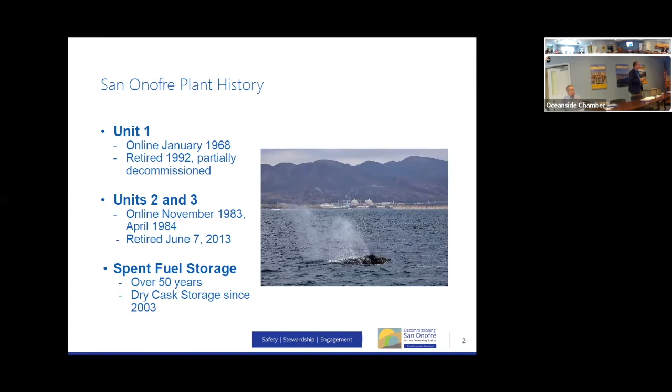When we talk about decommissioning, it's really a long-term process. The Nuclear Regulatory Commission gives nuclear plants 60 years to decommission. What does that mean? It means you're dismantling all of the structures that were involved in the operation of the plant, and you're decontaminating the site to a level, we're going below NRC standards, but to a level that the NRC deems as safe, which would be 25 millirem of dose a year.

We all get about 620 millirem of dose a year just from living. So very, very small amount. And that way the land can be repurposed for something else. Where we're located on Camp Pendleton, once we completely decommission the site, we'll turn the land back over to the Navy and end our lease with them, and they'll use it for their purposes.

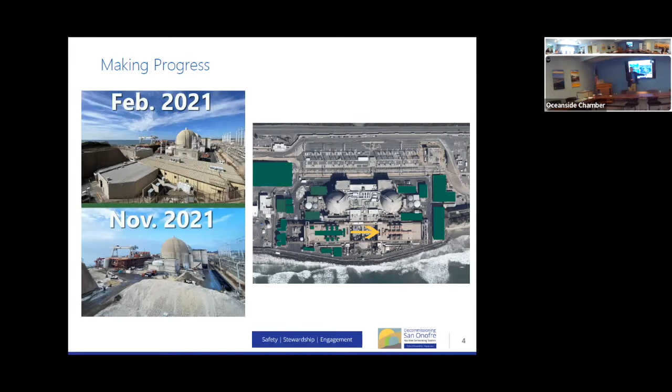This building up here was a large office complex building. That's now a rail yard, and that'll help facilitate taking things off site. We've removed these structures on top of the Unit 2 turbine building. We're now looking at removing these structures on top of the Unit 3 turbine building.

So the turbine buildings are a little bit different than some of the other buildings we've taken down, which have been mostly either warehouse structures or the diesel generator buildings, which were reinforced concrete structures, very robust, that took a lot of time to knock down. The turbine buildings are a lot of steel, and so there's a lot of cutting that goes on in terms of both those pieces of equipment that were on top of the turbine building, which is where the electricity was generated. So you had a high pressure turbine and 3 low pressure turbines hooked up to a generator, and all of that has to be cut up with torches in order to be shipped off site.

A lot of the material in the turbine building is going to be recycled. So we have millions of pounds of recyclable metal in there. And so we'll be taking that, shipping it to a facility that's outside Las Vegas, and then it will be shipped off for recycling. And then the condensers themselves have tens of thousands of titanium tubes in them. So we'll be removing those tubes, and those will be recycled as well.

So that work's going on. We should be done with the turbine building project in the 2023 timeframe. And once we're done with that, that will open up an area to where we can then attack the buildings surrounding the containment domes, and then eventually the containment domes themselves.

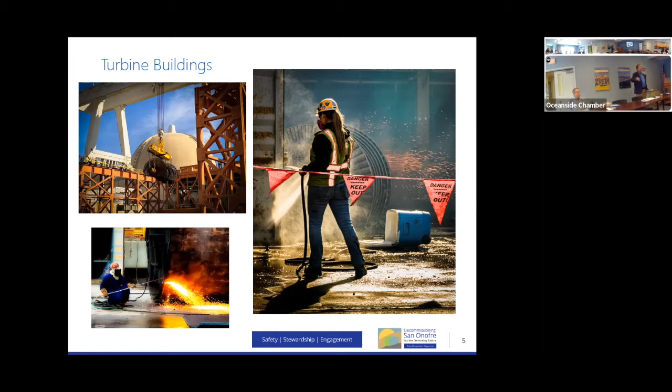So they're always ready to be filled with that pile of concrete and other material, and be able to be shipped out. And all this material is going outside of California. Nothing is staying in the state. So it'll be going either to Clive, Utah, or West Texas, or La Paz, Arizona, or, as I said, that facility outside of Las Vegas. So everything is going to be leaving the state.

And we should be done with this rail yard, ready to go, really probably within the next week, 2 weeks, like that. So, yeah, we'll be shipping those out.

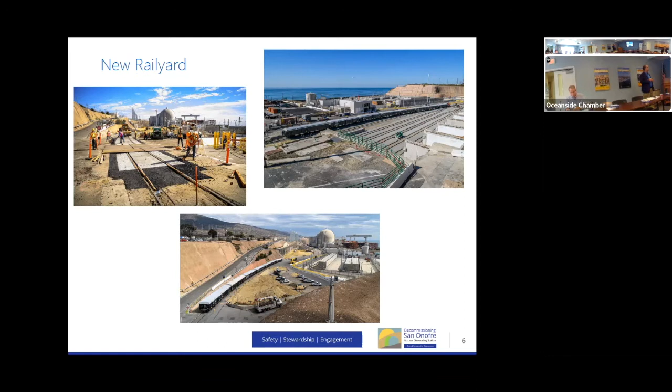And so we hired a contractor that specializes in doing this particular type of work, and they constructed this piece of equipment specifically to work on the SONGS site. And it's a large circular saw that goes around and cuts this piece of metal up. And this metal is activated with cobalt-60.

So it's what's called greater than Class C waste. So currently there's no place, much like spent nuclear fuel, to store that. So we'll be storing it on site with our spent nuclear fuel in our spent nuclear fuel storage systems. So we'll be having some additional canisters of this material there.

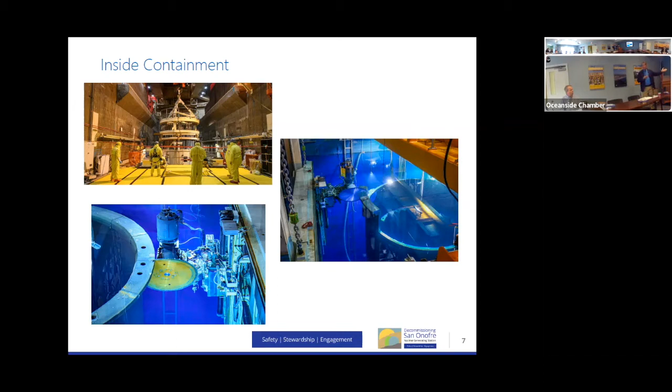So any questions on any of that? So what happens between 2029 and 2051? We just work on getting the spent fuel offsite. And really the focus is on securing the spent fuel. And that's kind of the next part of my presentation, how we do that. But I just wanted to see if anybody had any questions about the dismantlement.

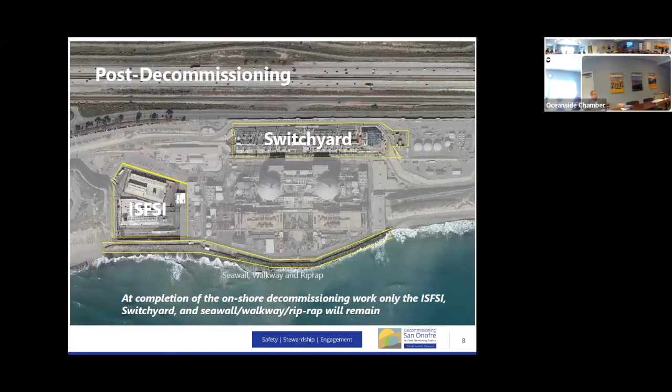Yes. Where will the fuel actually be located when you're at that final slide? You said in 2029. The fuel will still be here. Okay. Gotcha. So these are our two storage systems, and that's where it will stay.

And that's why we chose the system, because we have the walkway that's fairly close to this. We have a beach right there and everything else. So we chose a system that has this tremendous shielding to it. And that's why none of the radiation dose gets out to any significant extent.

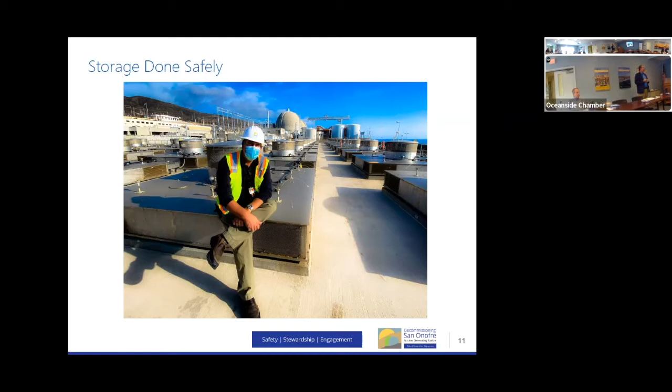We design spent fuel storage systems with a concept known as defense in depth. And the first layer of that defense is this ceramic pellet, which locks in the U-235, the plutonium, the cesium-137, the strontium-90, everything is in here and can't get out.

So in our storage systems, as I said, we have two of them. We have 123 canisters of spent nuclear fuel on site. So it's a lot of canisters, and it's going to take time to transport all of those off-site. It could take anywhere from 10 to 20 years, depending on how the system develops to do that. In our Orano system, we have 50. In the Holtec system, which is the one we just finished loading in August of 2020, we have 73. Both of them feature incredible technology to protect the spent nuclear fuel. The Orano system is a horizontal system, and the Holtec is a vertical system.

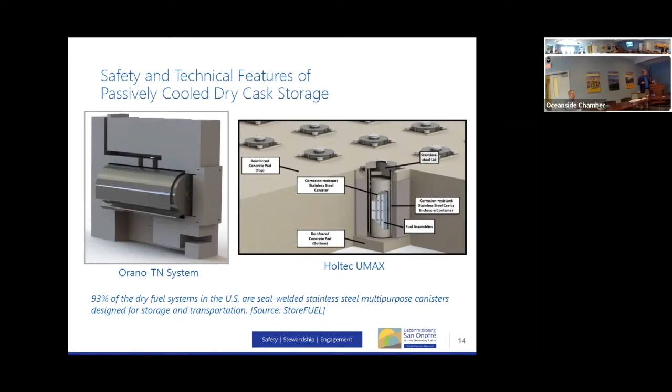And inside the canisters are the spent fuel assemblies, which contain the fuel. But there's no moving parts or anything. There's no water in the canisters. It's just helium, which is inert, which prevents corrosion. So these canisters have a service life of more than 100 years. We use 5/8 inch 316L stainless steel, which is corrosion resistant. So this helps us to be able to keep the fuel safely stored for as long as it's on site.

And that's important. So we went with 5/8 inch stainless steel. A lot in the industry use 1/2 inch. Many nuclear plants use 304 stainless steel because they aren't in highly corrosive environments. We did some extra things with our canisters that reduce a type of corrosion called chloride-induced stress corrosion cracking. So the welds on our Holtec canisters are laser peened, which was an innovative process.

And the seismic rating for the systems is 1.5 G. We measure seismic motion in peak ground acceleration. And the plants themselves, units 2 and 3, were built to 0.67 G. These are more than twice that. So if we had a large earthquake, the safest place to be would be on this dry fuel storage system, because nothing is going to happen to it.

The systems can be inundated by 50 to 125 feet of water and still perform their safety functions. And as I said, service life of 100 years or more. So the fuel will be safe as long as it's here. Certainly in 100 years, we should have this issue solved and be able to move the material off-site.

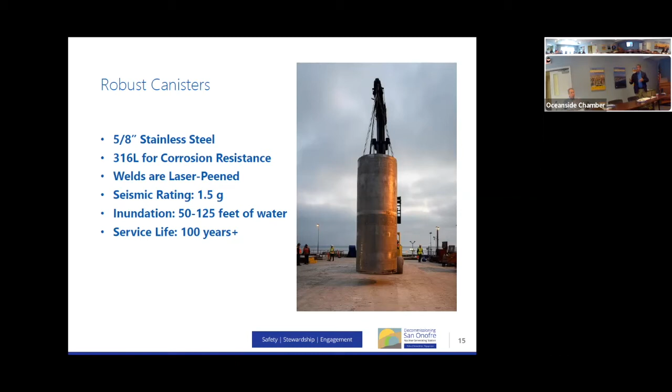No one has ever been harmed by spent nuclear fuel in the entire history of spent nuclear fuel. The environment has never been harmed by spent nuclear fuel in the entire history of spent nuclear fuel. So it's not that we need to worry about the spent nuclear fuel doing something. It's just that we have the 2 very specific reasons for why it should be moved.

In terms of risk reduction, this kind of shows a little bit of that. So when the reactors were operating, we had 82 emergency action levels, and those were essentially accident scenarios that we needed to plan to be able to mitigate while we were operating. Once the reactors were shut down and all the fuel was taken out of the reactor cores, we dropped down to 18 accident scenarios. Now with all the fuel in dry storage, we have 3, and none of those involve any radiological material leaving the site.

So it's all going to be contained there no matter what. And that's why I get back to the 2 main reasons for why this needs to go, because it is going to be safely stored while it's here. Yes. Are you allowed to tell us what those 3 worst case scenarios are?

I wouldn't say they were called worst case scenarios because in nuclear, you have certain things that could happen. They classify emergencies. And so we can only have the 2 lowest classifications, and that doesn't involve evacuation and everything else. It's really security related. So I can say that.

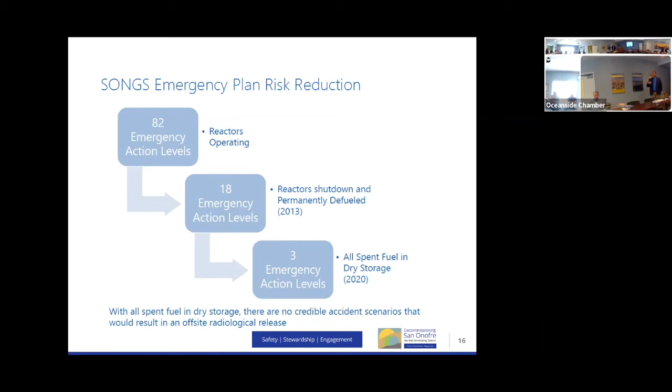Generated, okay. Yeah, and so the hottest fuel assembly we have, and a fuel assembly at SONGS is like this. It's about 14 feet tall. This is just a mock. But the Holtec canisters can hold up to 37 of these. So the hottest fuel assembly we have on site gives off as much heat as a hairdryer, about 1,500 watts. But you put 37 hair dryers together, they're gonna be warm. Yeah, you're gonna get some heat.

But that's reducing over time. And so the canisters that we had stored since 2003 are cooling quite well. Like what percentage? Yeah, the radioactivity, the radiological hazard of spent fuel is about 1/1000 of what it was when it came out of the reactor after about 40 years. 40? Yeah, so the really hot radioisotopes, things that are really radioactive, have very short half-lives. So they don't stay around very long.

So when you talk about things like Chernobyl, the radioisotope that was the issue at Chernobyl was iodine-131. And that only has an 8-day half-life. So after we shut down, 3-4 months after that, all of the iodine-131 was gone. That's why you don't need KI pills and all those types of things anymore, because it's not present in the fuel anymore. And that reduces the heat, with some of the other short-lived isotopes being gone.

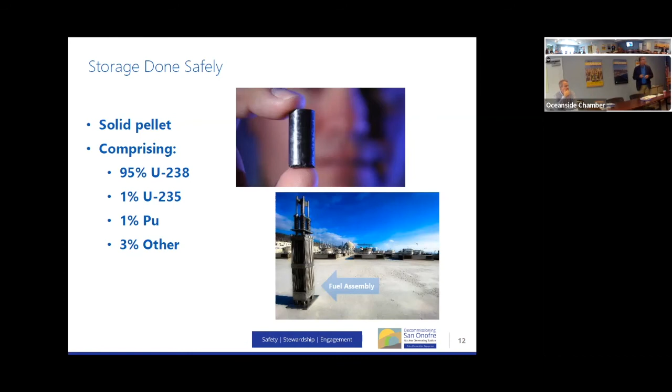So as I said, we don't want the fuel at SONGS any longer than it has to be. And so last year, in March, we released a suite of plans that really looks at what we can do to remove this fuel from the site as a singular nuclear utility. What can we do? So the strategic plan looks at the national picture. Where are we in terms of the spent fuel management program for the Department of Energy at the federal level? What might need to change in order to really get this program kickstarted and moving in the right direction?

One of the things that we found was we should probably have a standalone agency that just deals with this issue, that is not subject to administration changes and political winds, but just has a dedicated focus on this issue, much like Canada does. They have a nuclear waste management organization that is a couple of years away from naming a couple of sites for their deep geologic repository. And so we have a lot to learn from how they're going through the process. Is that a private sector organization or a public sector? No, it'd be a public sector.

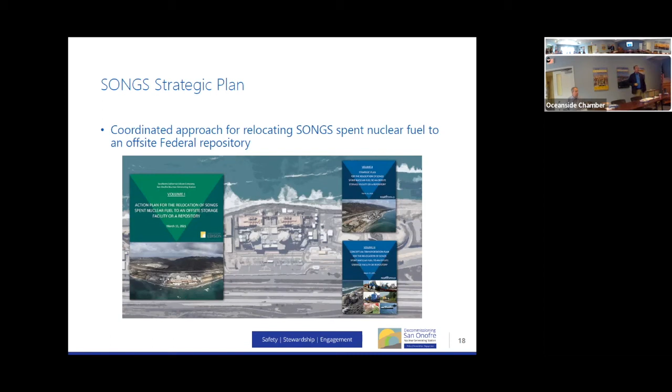But we also realized that really we can't do it alone. And so we, with our partners, launched this Action for Spent Fuel Solutions Now coalition, which we've gotten great support from San Diego County Board of Supervisors. Supervisor Jim Desmond is the co-chair of the group, and along with Orange County, Lisa Bartlett is the other co-chair of the coalition. And so what we're trying to do is bring folks together so that their voices can be heard, because right now there's no

motive force to get action going on this issue, because we're talking about such long time frames. And when you have something that is good for 100 years, there's no impetus to act quickly on that. So we need to solve this issue. We shouldn't leave it for additional generations to figure out. We need to do it right now, because of climate change.

There's a lot of focus on new nuclear energy in this country. A lot of states are reversing their nuclear moratoriums that they had in place. And so there's the potential that we're going to be generating a lot more spent nuclear fuel. So we really need to start figuring out the back end of this fuel cycle.